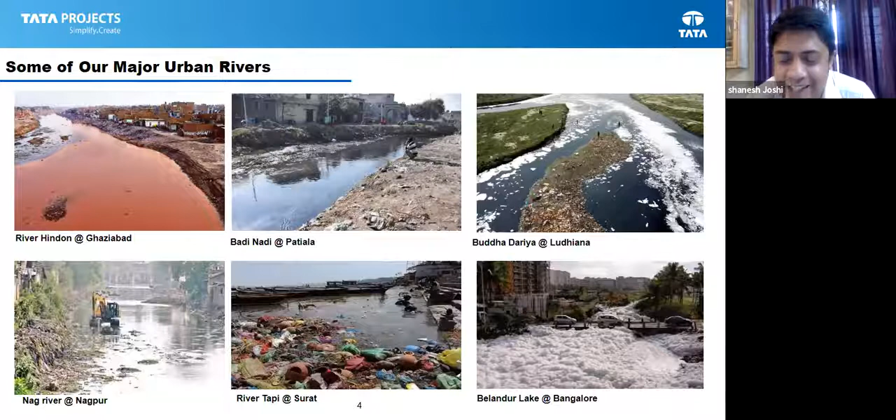These are all different rivers, but they are all the same in character. They look all the same - full of solid waste dumps, heavily silted with sand and hyacinth. You can see a good amount of unorganized, undeveloped areas on the banks of rivers. So we have clearly not managed our rivers very well in the country.

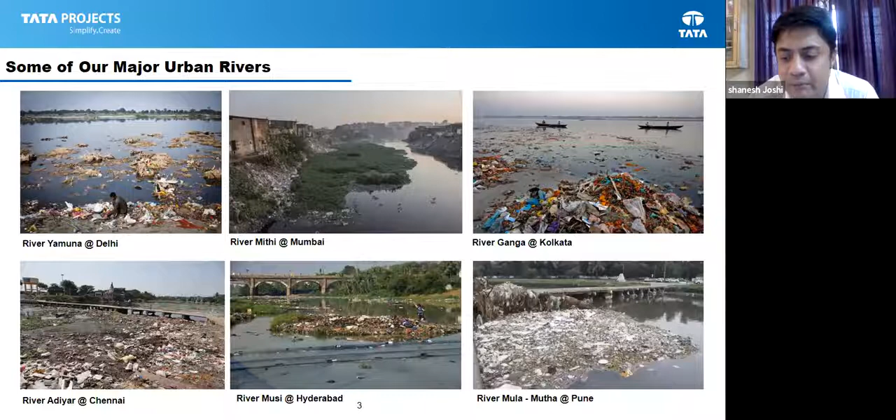This is high time we should give due attention to these, because there are major risks we are carrying today in our lives. The major and most important risk is the pollution of surface water and groundwater. When we are dumping so much solid waste, or not managing wastewater properly, a lot of industrial and domestic wastewater without treatment is going into these rivers.

Definitely we are creating very harmful, unhygienic conditions. We are prone to waterborne diseases, because this water, not only surface water but this water trickles down into the groundwater and spoils the clean groundwater. Then these are typically mosquito breeding fields. So you will suddenly see a surge of dengue, malaria in urban centers quite often whenever it rains and the water stagnates.

So it's a major risk. The second risk is of flooding. I come from Hyderabad, I'm based out of Hyderabad. So the last 10-15 days were really horrible. We have seen a very concerning situation, because the rainfall happened - it was not very heavy, it was moderate rainfall, I would say.

But still we had so much of issue, because the Musi River is fully encroached. There is no buffer zone left, and the water could not actually pass through the river, and the entire city was flooded.

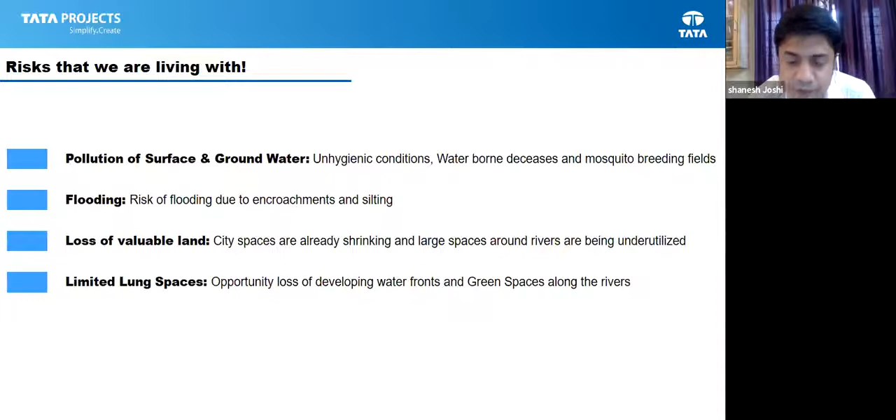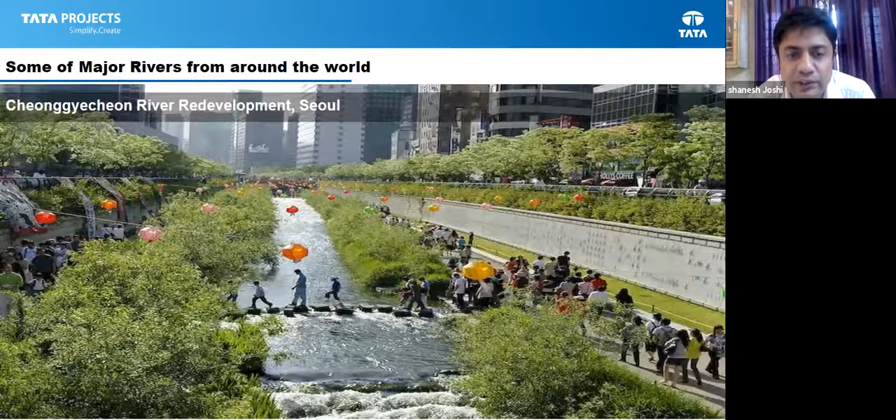So we have clearly missed on this particular opportunity, but I think it's time that we should realize, and we have examples in front of us. If we just step out of India, we maybe go to Seoul - there is this Cheonggyecheon River in Seoul. Then we have the Rochor River in Singapore. Then we have the Bow River waterfront in Canada.

So what do you see in these rivers? While we have seen what our rivers look like - definitely not good - while their rivers are definitely more beautiful and clean, if you notice the skyline next to all these rivers it is so beautiful. You can see commercial spaces, high-rise buildings, parks. So they have captured this opportunity of developing a river zone into a very promising, environment-friendly, and commercially active zone. We have clearly missed on this particular opportunity in our country.

As I was saying, when we entered into the environment business, we realized it's time that, as Tatas, which is a very socially oriented group where we look after social needs and try to address them, we realized we need our urban rivers to go through a major transformation. We actually started working on developing rivers around the country. We identified several rivers, and we got very good support from the government of Rajasthan and central government, who accepted that we were willing to take up this challenge of transforming a nala into a river, and they supported us.

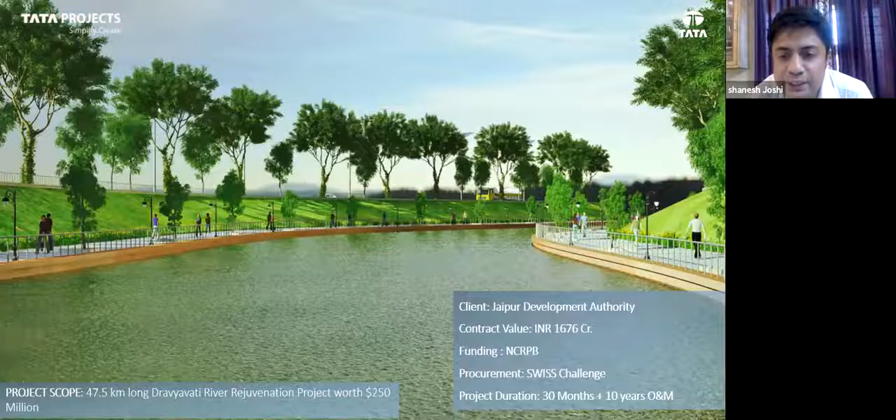He will give you more glimpse on this particular project from a planning point of view, but I'm going to just give you a broad understanding of how this was done. The development agency was Jaipur Development Authority. The total cost of this project was 1,676 crores. It was funded by National Capital Region Planning Board, a central government entity which funds such unique projects. The entire project was completed in 30 months. We started somewhere in March 2016, and on 2nd October 2018, this project was inaugurated for the public.

Now, ironically, you would have all heard about the Namami Gange program, where we are trying to rejuvenate our holy river Ganga. You'd be surprised - we are miles away in Jaipur, very far from Ganga. But this project actually also helped in cleaning Ganga. How? I'll tell you - this is a tributary of the Dhund River. So water from this goes into Dhund, from Dhund it goes into another river, from there to Chambal, Chambal goes into Yamuna, and Yamuna finally ends up in Ganga. So our small effort of creating a good water body here in Jaipur has also benefited the River Ganga. Every small step you take helps create that larger picture.

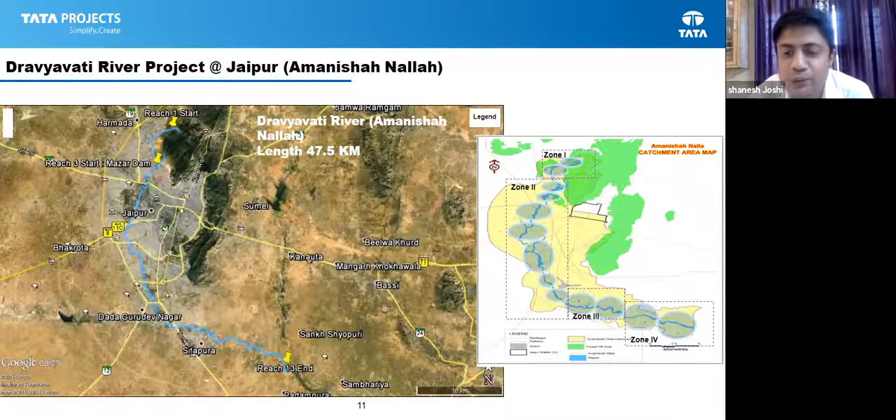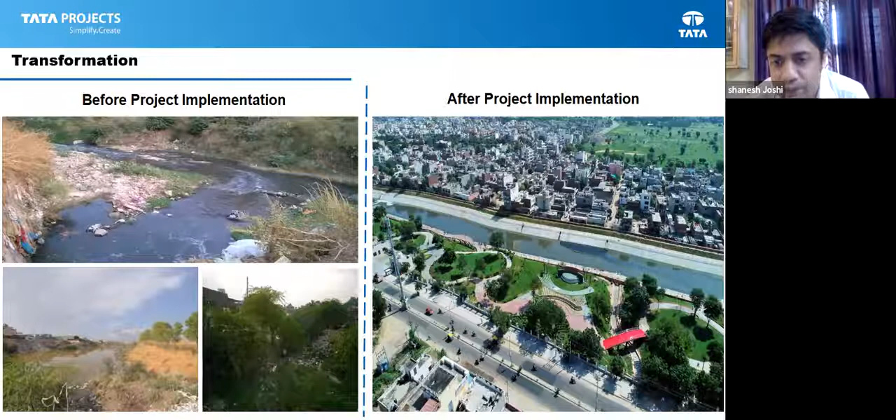What we have done is channelize the river. When you channelize it and maintain it well, you get a good amount of land that comes out of it, where you can plan either public space or commercial space. You can see very beautiful parks have been created - there are walkways, cycle tracks, open air theaters and more. Almost 72 hectares of land has been reclaimed, which they have now started monetizing - they're going to sell this land for commercial purposes, and I'll show you some economics of this project in subsequent slides.

It was a very uphill task - not easy, definitely, because whatever we have done to our rivers, it's going to take a lot more to bring them back to their original form. Huge amount of concreting was done. We don't recommend concreting, but it was necessary because Jaipur has flash floods, and to manage that velocity of water, we had to line this channel in certain sections. It's not completely concrete-lined - somewhere it's natural, somewhere it's stone pitched, but wherever there was a velocity or flooding issue, we had to line it.

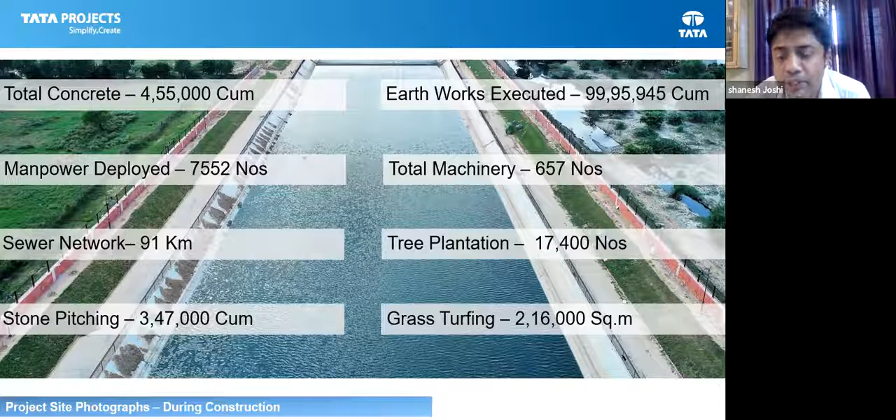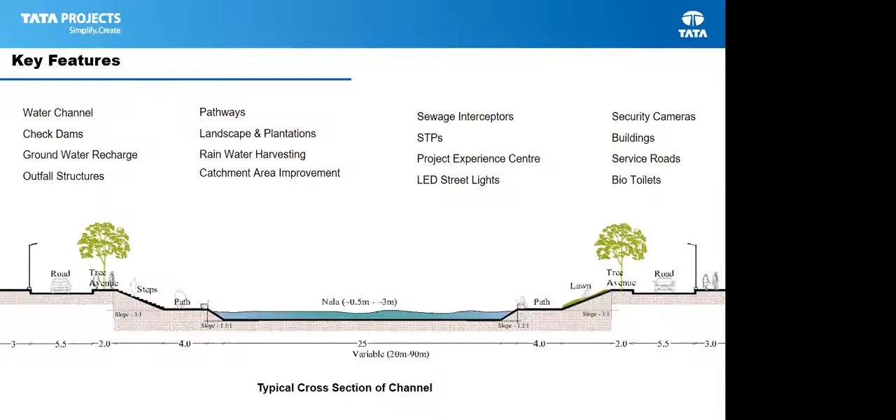Almost 99 lakh cubic meters of earthwork was done, 17,000 trees were planted, and 2 lakh 16,000 square meters of grass turfing. A lot of work went into bringing this river back to its original form, and obviously a lot of money was spent. Key features we envisaged at that point were to have good public space - a 47-kilometer right of way gives ample opportunity to create pathways, walking tracks, cycle tracks. We also had sewage treatment plants, since we needed very clean water flowing into these rivers. We'll talk more about the features when Mr. Santosh takes us through that.

Some of these pictures, I think, are a bit old, but you can see how this entire space has transformed.

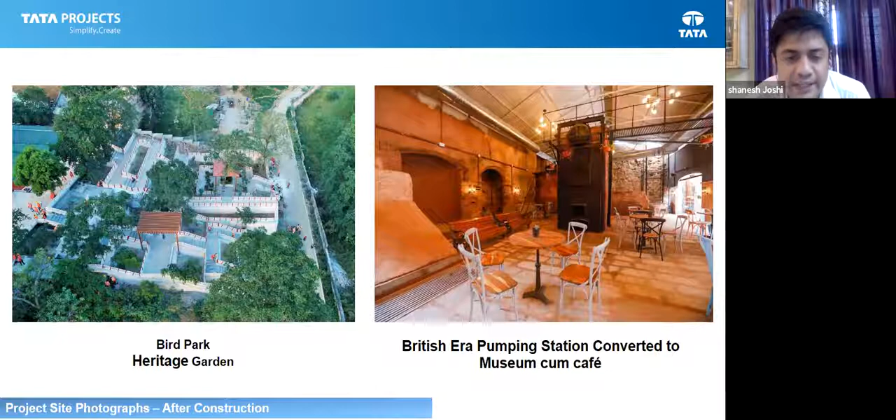While we were working on it, we found a British era pumping station, which was not even noticed before. We have created a beautiful museum out of it, and there is a cafe that has been built. A lot of people come and visit this cafe now. There is a bird park, a heritage garden, and a good amount of green space, though Jaipur is typically desert, people are not really used to seeing so much water and greenery there.

But now I think with this project, the entire skyline and landscape of Jaipur city has changed. We have also constructed a project experience center. Those who happen to visit Jaipur, I would recommend you please visit the project experience center where you will get to understand how this project was conceptualized and delivered.

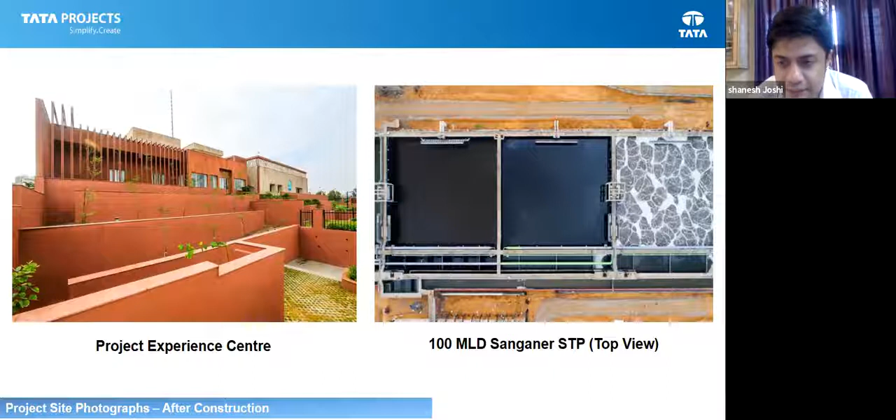We got a lot of appreciation. Our honorable Prime Minister has congratulated us. Our Vice President has taken an aerial view of when this was being developed. We have got several awards.

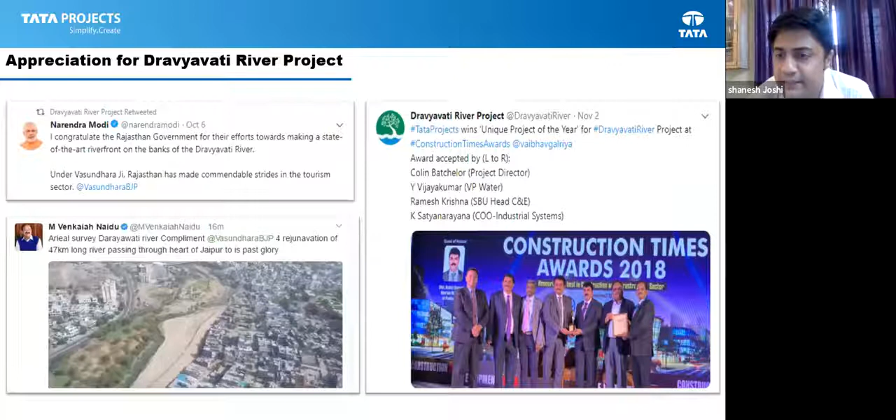So this is typically a people's project. I think any such project, because we are the ones who have actually spoiled these rivers, we should take accountability. Each one of us should take accountability that yes, we have spoiled the rivers, and I think we should take responsibility of cleaning it.

So these are all people's projects. I think we have gone through this people cycle very well in the last 4-5 years, where we had stakeholder engagement, people engagement. We told them why this project is important and why it should be done, and how they are going to get benefited. We organized school picnics.

A lot of students, young minds came. They saw the experience center. They realized, yes, we have not done the correct thing, and it's time that we should correct it. They were actually very happy to be part of this particular project.

So what was the value that has been created? The first and foremost is health. We have improved air, water, and land quality by doing this particular project, which is going to benefit not only the river area, but the entire river zone and the people staying in and around it.

Definitely, I don't think there has been any flooding since 2018 in Jaipur. Since we have commissioned most parts of the project, in fact this year we have seen videos of how well the entire storm water was managed.

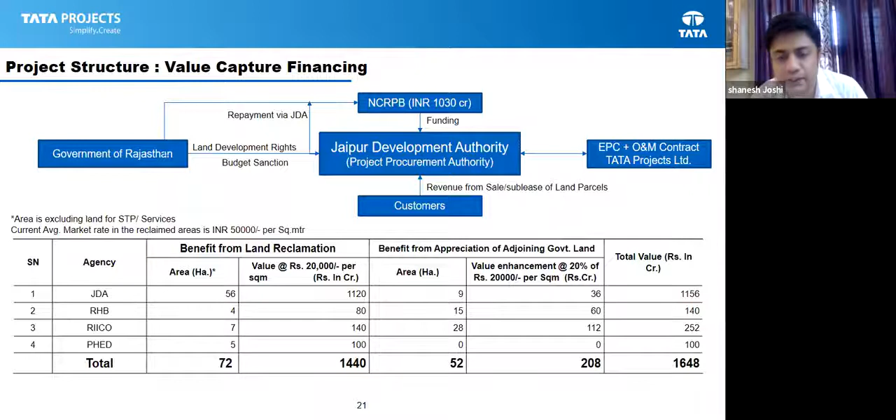Even with conservative numbers, such a project, once fully developed, can contribute to paying back all the loans that the governments would be willing to take. So a very healthy river hygiene project. I think we should all be proud of it.

I think since we have worked on this, we have learned the tricks of the trade, and we have understood how this can be done.

Sabarmati was a project done in Gujarat. I think you all would be familiar with it, and it was very rightfully highlighted by our Honorable Prime Minister. But typically, I would say it is a river development project, not a river rejuvenation project, because they had a good source of water from Narmada, and they wanted to transfer that water into their irrigation channels. So they used Sabarmati as the water channel. They had a good source of clean water with them, and they managed to do development around those areas very nicely. But if we talk about river rejuvenation, this is what and how it needs to be done.

So I think I have covered a bit of the points that I had to share with you all. I hope this has given you a perspective of how these rivers are important in our lives, and how each one of us can contribute to developing these rivers.

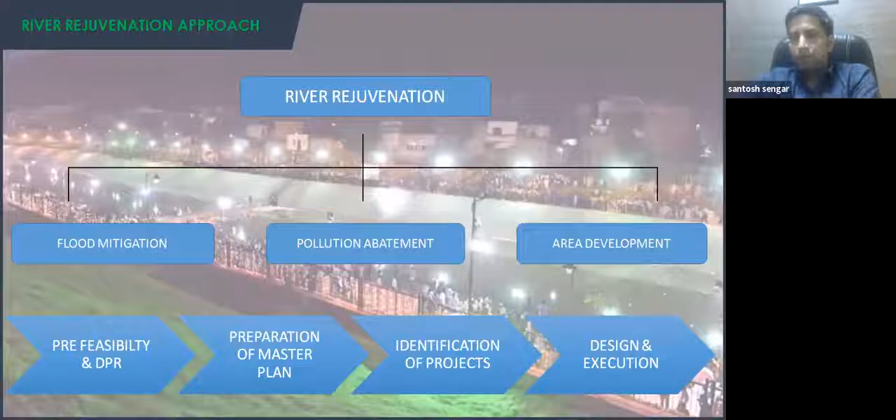River rejuvenation is basically an exercise to bring rivers back to the closest form to their natural form, by way of flood mitigation, pollution abatement, and some beautification - area development, which we combinedly call area development, which is basically master planning, landscape design, urban design, and all kinds of planning and architecture works.

River rejuvenation has three major components. One is improving river hydraulics, basically improving their flood carrying capacity. Second is pollution abatement, which has 3-4 parts: solid waste management, cleaning the water, and then further natural treatment of water.

In area development, we have done various kinds of activities, including master planning, creating urban redevelopment guidelines and all.

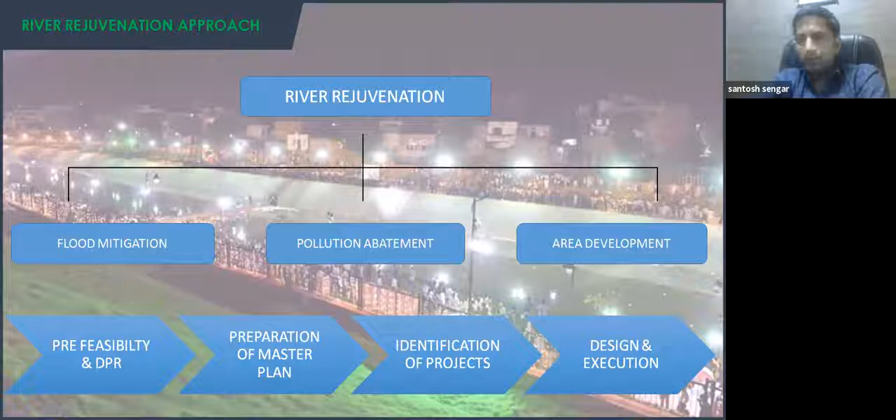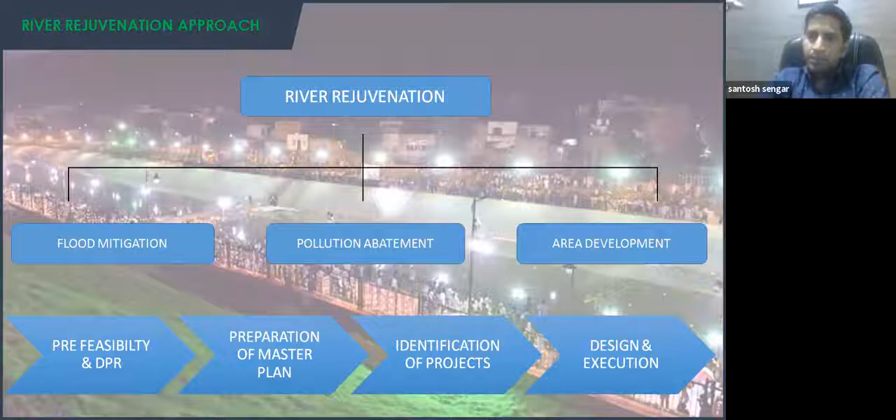In terms of explaining how we go about this whole river rejuvenation process, first part is the pre-feasibility and detailed project report, DPR. After the DPR is formed, then we go for preparation of master plan. When a master plan is prepared, then we identify certain projects for execution, and then we design and execute those projects.

I'll explain the Dravyavati river project in terms of how we go about river rejuvenation, which we have done for many other rivers subsequently. So to understand the Dravyavati project, we'll need to understand closely how this river was.

As Mr. Shanis has told, this river was historically known as Dravyavati, but later the Dargah of Amanishah was established during the Mughal period on the northern edge of this water stream. During that period, Jaipur was a very small, fortified town located on the west of this water stream. Since then, people started calling it Amanishah Nallah, and eventually it turned into a Nala in a very degraded state.

It had lots of sewage flowing into it. Solid waste was deposited all around the river. Generally, we could say it was a degenerated ecological environment. There was slumming along the edges, encroachment at many places where there was hardly enough space for the water to flow out. Length of the river is quite huge, 47.5 kilometers.

The most important thing is that the gradient from start to end of the river was 150 meters, and that was the reason why concretization was done for the river, just to carry that flow, because the slopes were heavy, and it was a major engineering challenge why that was done.

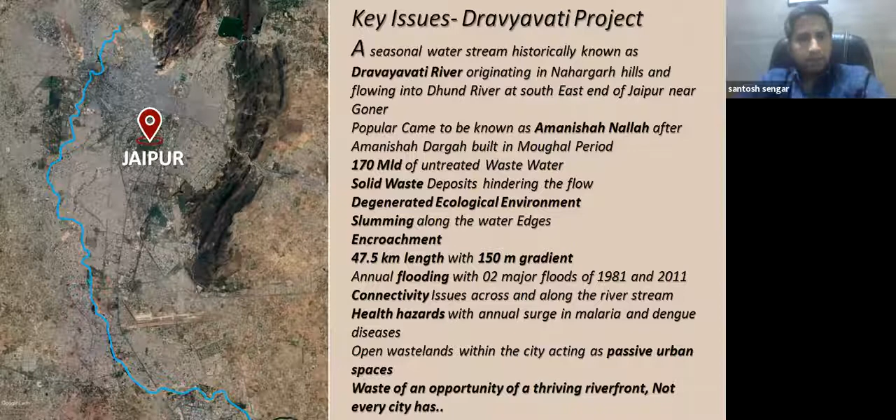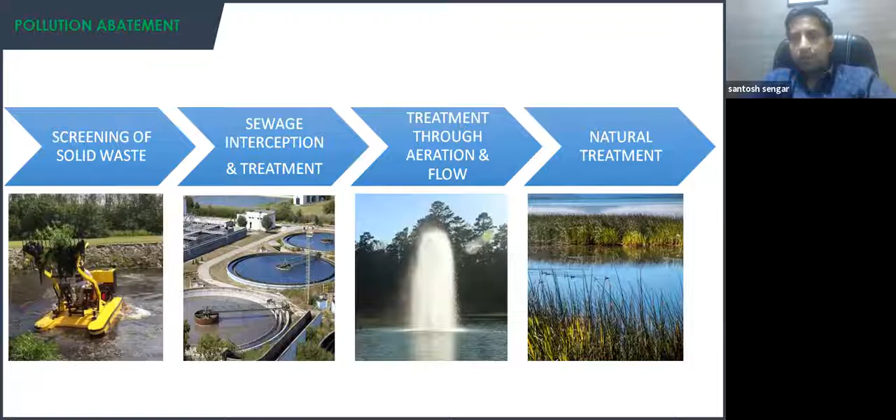I will not go into detail of pollution abatement, but I'll briefly describe. These are basic three or four parts - not necessarily we have done all of it in this project, but gradually we have refined this process. The first part is screening of the solid waste. Then we go for sewage interception and treatment through sewage treatment plants. There's an aeration technology where we create water fountains within the river stream for aeration of water. Then we can also go for natural treatment of water.

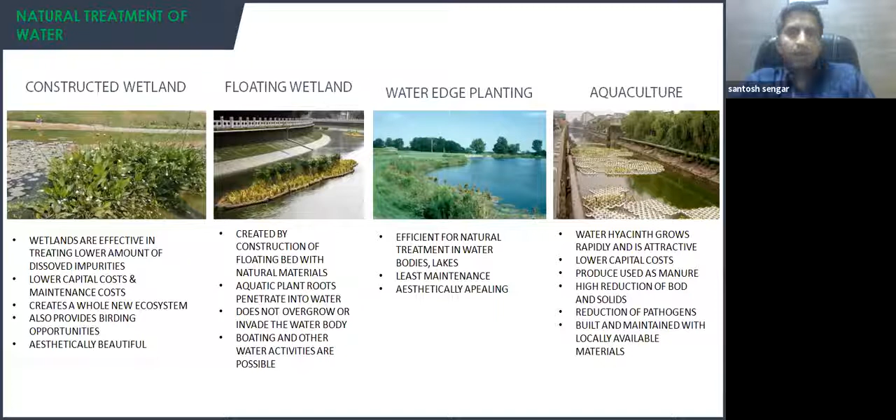There are different technologies to treat water naturally, like constructed wetlands - you must have heard about it - floating wetlands, water edge planting, where we plant certain flora along the edges which will treat the water. And there are floating pods.

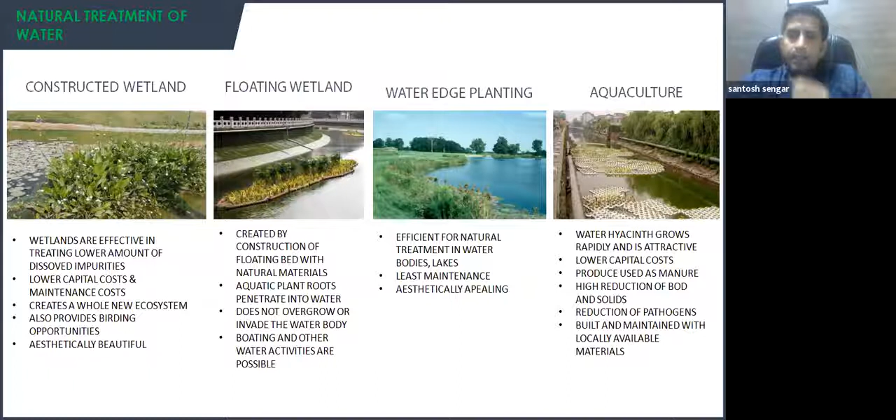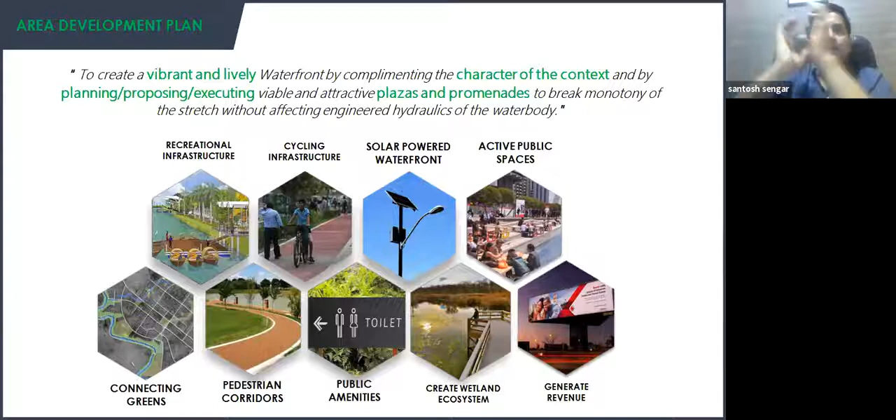So in order to go ahead with this project, we started with creating a vision - basically to create a vibrant and lively waterfront by complementing the character of the context, and by planning viable and attractive plazas and promenades to break the monotony of the stretch, without affecting the hydraulics of the water body. This vision carried everything when we started.

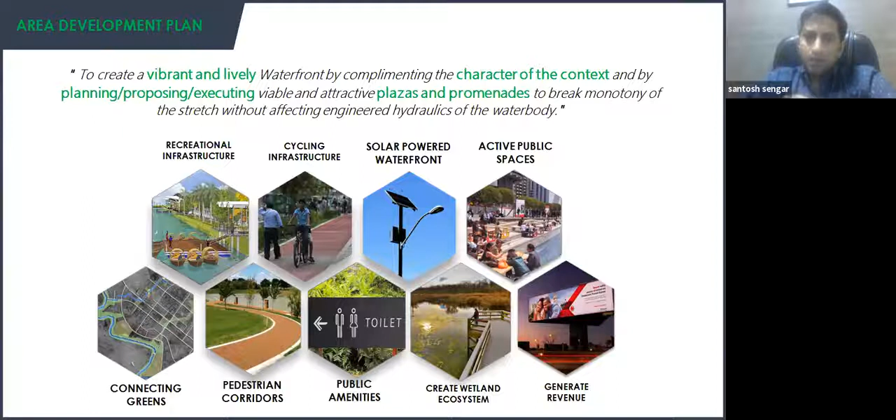And then we came out with certain objectives - to provide certain amenities and infrastructure, like cycling infrastructure, creating public amenities like toilets, creating a walkway, and connecting the greens located all along the river.

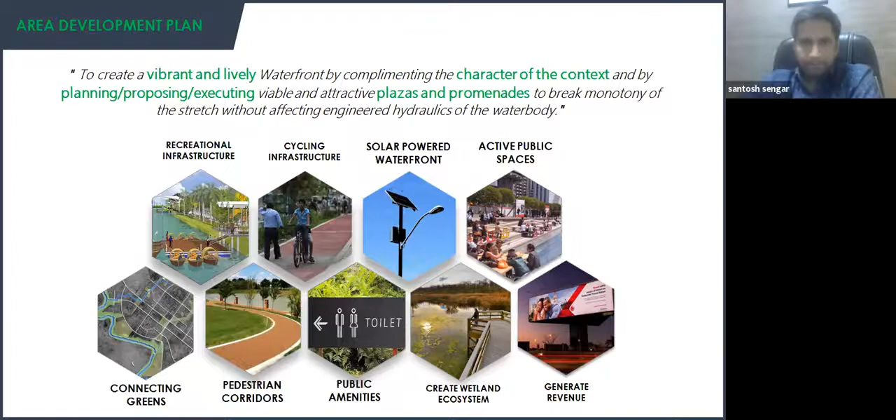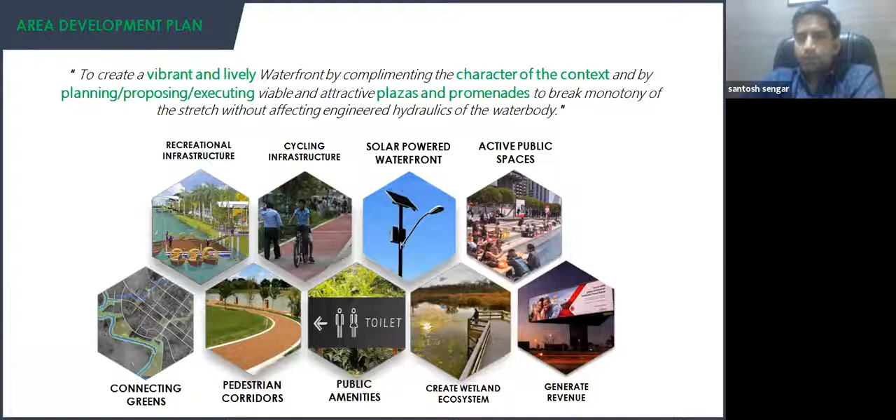In terms of explaining the whole project, I'll explain what were the major projects undertaken. The first part was the master planning of the project to begin with. A master plan for the whole project had to be prepared, and this was a big challenge because the master plan for Jaipur was already in place.

In Jaipur's master plan, this river was shown as a river zone without assigning any detailed land uses. All the lands in the river zone were lying vacant because there were no development guidelines for those areas - even if we don't talk about the river, those areas were lying vacant.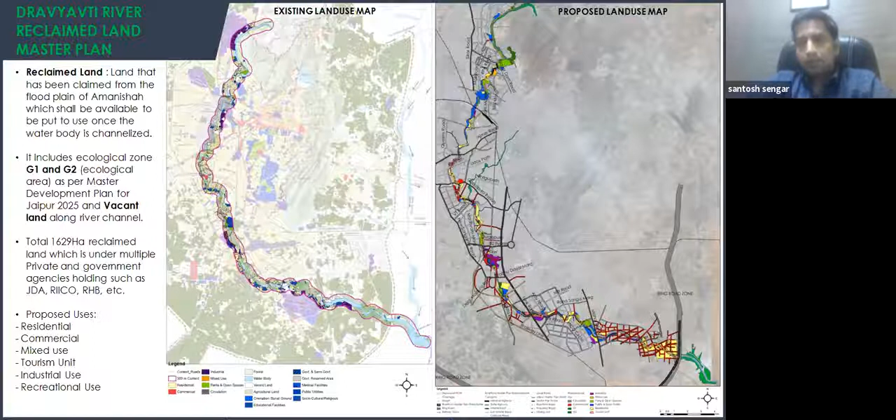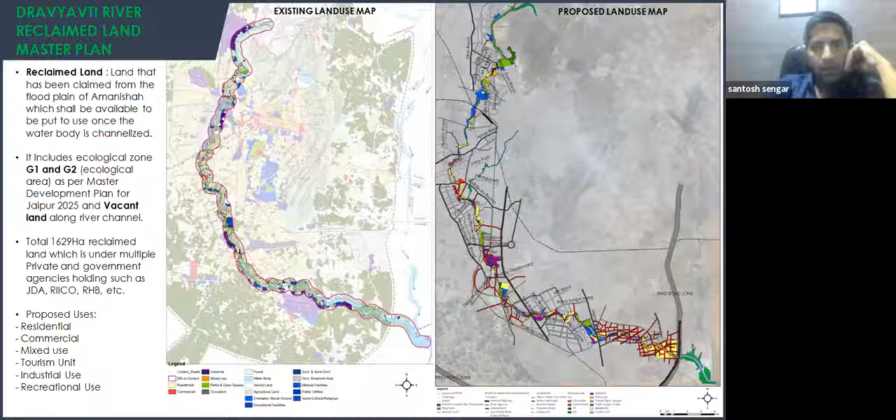So the first exercise in master planning was defining a project area. When we talk about a river, it has a certain affected area or context area. To define that, we had to do certain exercises, so certain layers were taken into account. The first thing was the Geological Survey of India - we collected the river boundary from the Geological Survey of India.

The second was master plan delineation of G1 and G2 - G1 and G2 areas are basically eco-sensitive areas marked by the master plan. Then there was a layer created of vacant land parcels and built-up areas.

Also, the vacant land parcels of government ownership lying immediately next to the river were taken into the project area. And in case of river dams, where water was flooding beyond those areas, those areas were also taken into account. So that's how the project area was delineated.

On the left, these are the basic components of the master plan which was prepared. First was the base map. Second was understanding the engineering aspects, which is very important. When doing a project like this, you need to understand the river hydraulics and different activities proposed from the engineering point of view, and how they will affect your land uses.

First was the preparation of a conceptual plan. Then certain workshops were conducted for public involvement. Then a proposed land use mix was created, which we call the draft master plan. We'll not go into the details, but it also included a business plan.

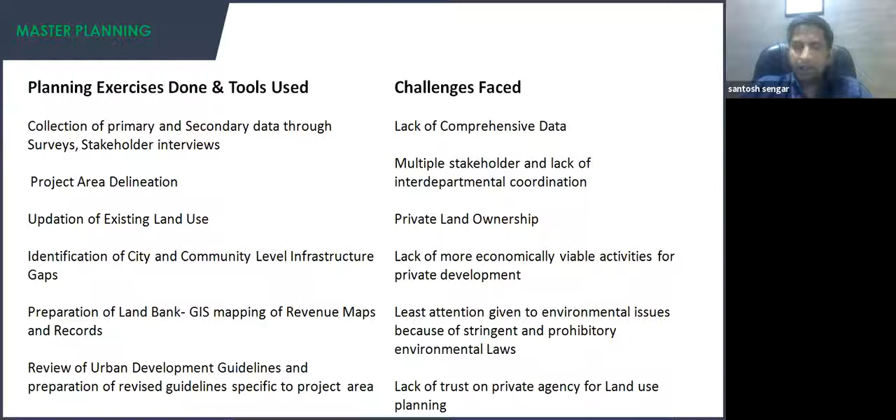The next thing is that when a land use plan is prepared by a private agency, there is definitely a trust factor with the local body. So this is what we faced during the master plan preparation. Though after the master plan, we had identified certain land uses and carried out the riverfront development.

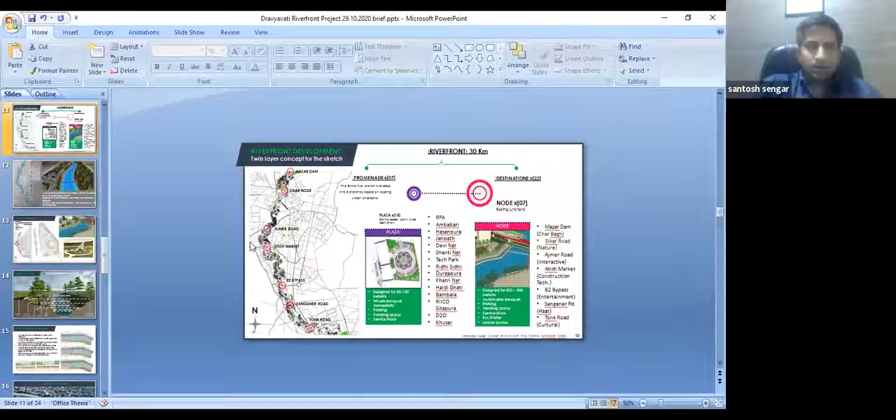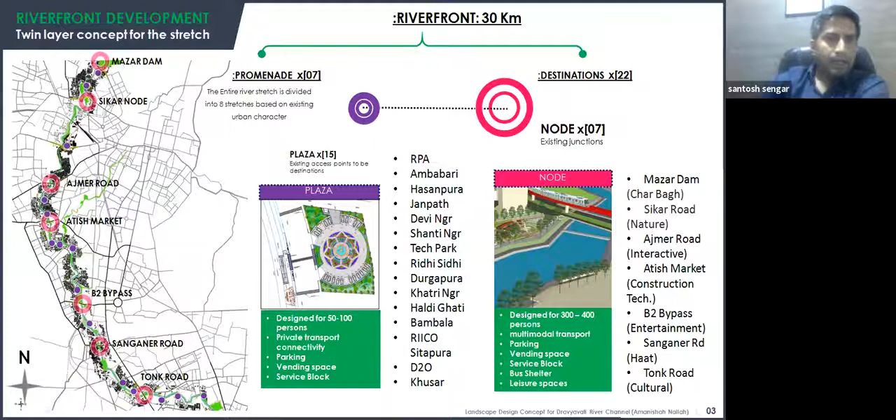In riverfront development of that 47.5 kilometer stretch, we identified 30 kilometers which was within the city limits as the riverfront development, and we divided that stretch into certain destinations.

We had this long stretch which we had to design, and we wanted to break the monotony, which I explained earlier. So we decided to divide that whole stretch into promenade and destinations.

By promenade we mean a linear stretch of river bank where facilities will be located, where cycle track and walkway will be there, and there will be destinations which we have called nodes and plazas.

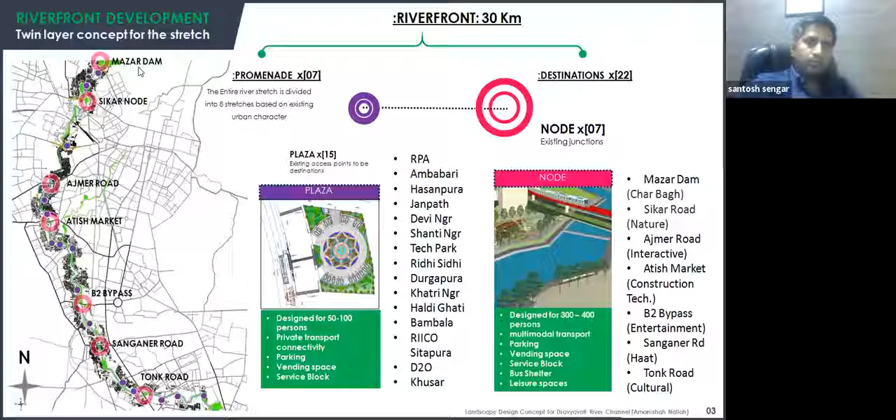On the map on the left hand side, these are the locations of major nodes: Mazar Dam, Sikar Node, Ajmer Road, Atish Market, B2 Bypass, Sanganer Road, and Tonk Road.

In terms of explaining what these nodes and plazas are, if you're from an architecture background in urban design, there's a concept called a node where the urban character is changing. We identified those areas where this urban character was changing, where a major transport node is available, transport connectivity is available, and where people will access the river. Those points were called nodes.

They were designed for a particular capacity. For example, a node was designed for a gathering of 300 to 400 persons, with multimodal modes of transport available. We had to provide parking there, vending spaces were provided, a service block was provided which was basically a toilet block, a bus shelter was provided, and space for recreational activities.

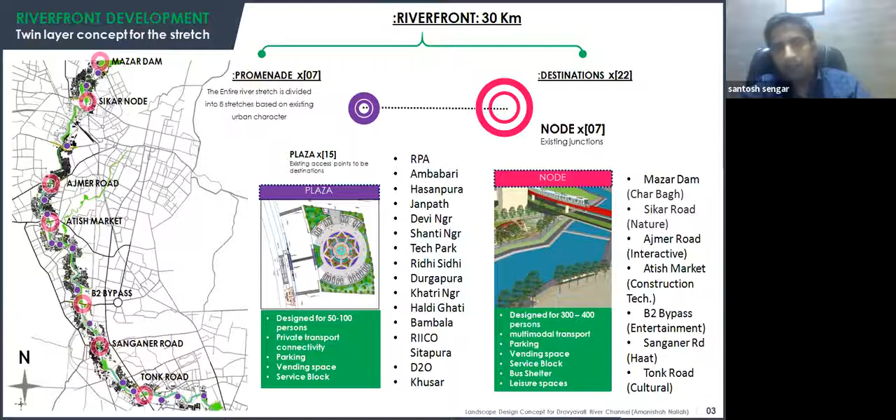A plaza was a smaller place, designed for 50 to 100 people. These were areas located within the residential neighborhood. So nodes were mostly located along commercial areas, and plazas were located in residential neighborhoods.

In terms of giving them identities, this whole riverfront was designed and themed on celestial bodies. Based on our seven nakshatras (constellations), we gave them a theme.

And activities were planned accordingly.

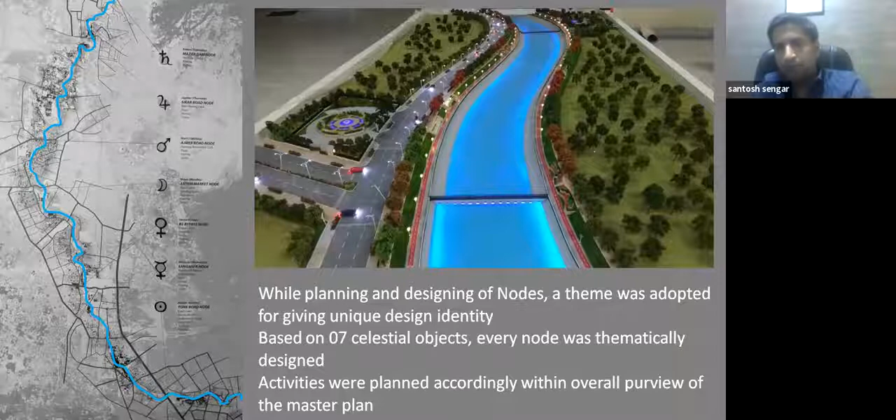This is one example of a node, the Atish Market node. Riverfront restaurants were provided, a sundial was proposed, public toilets were proposed, and vending spaces were provided. This was located near a metro station where connectivity from all other places was provided, and a river crossing was provided.

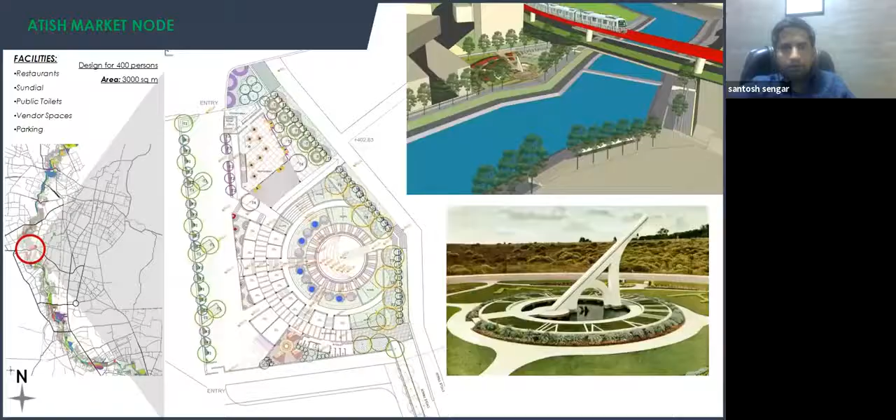In terms of explaining the typical river section, which I have called the promenade, it was designed keeping in mind the engineering aspects of the river design, which Shanice has explained, the hydraulics.

This is one typical section, not necessarily the only section for the riverfront development, but it's designed for different flood levels. The lowest level is the dry weather flow level. The 25-year flood level is the level of the maximum flood in a 25-year period.

Then there was a 50-year flood level and a 100-year flood level. The 100-year flood level was the level where normal development will be permitted. Within the 100-year flood level, we provided cycle track and walkway at the 50-year flood level, and within the 25-year flood level, nothing was provided.

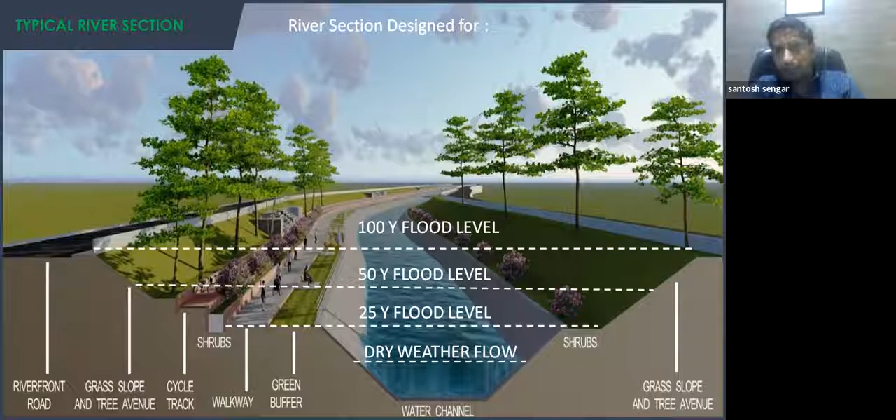So this was the typical section. All your amenities like sit-outs and toilets are provided at the 50-year flood level within the river right of way.

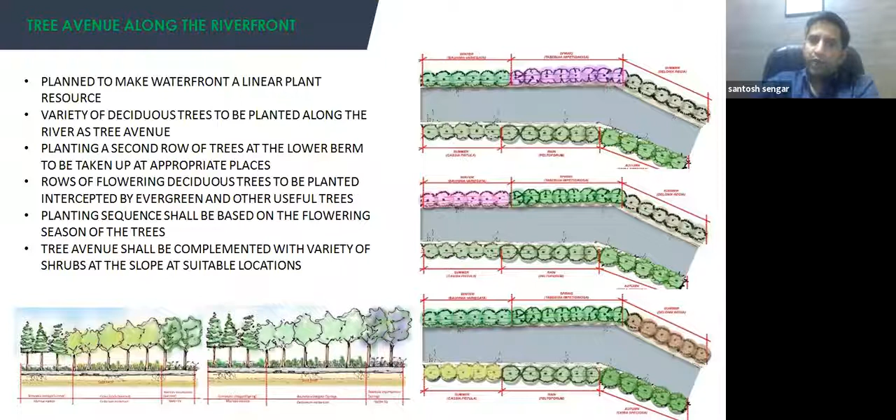In terms of the tree avenue, which is the plantation of trees all along the river edge, it was planned as a linear plant resource with a variety of different trees, arranged in a pattern so that at every point of time there will be flowering in a certain stretch along the water edge.

I'll go to the landscape design of different parks. There were three major city-level parks designed within the project. One of them was the bird park, the Sikar Road Bird Park. This site was basically the site of an old dam created in 1853.

It was an old dam with a broken wall, and there was a small wetland located just off the Amanisha Nala. The idea was to create a space to conserve that wetland where we can go out for natural activities. Bird watching decks were created.

So this was the place where that colonial period pump house was located, which was identified and restored as a waterworks museum and cafe.

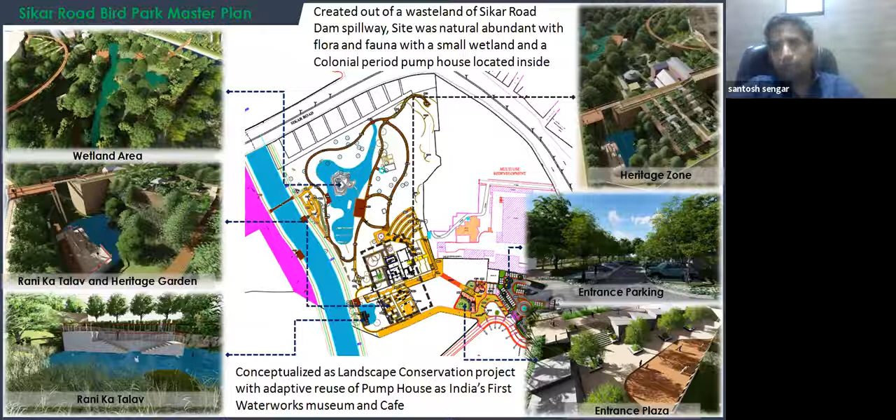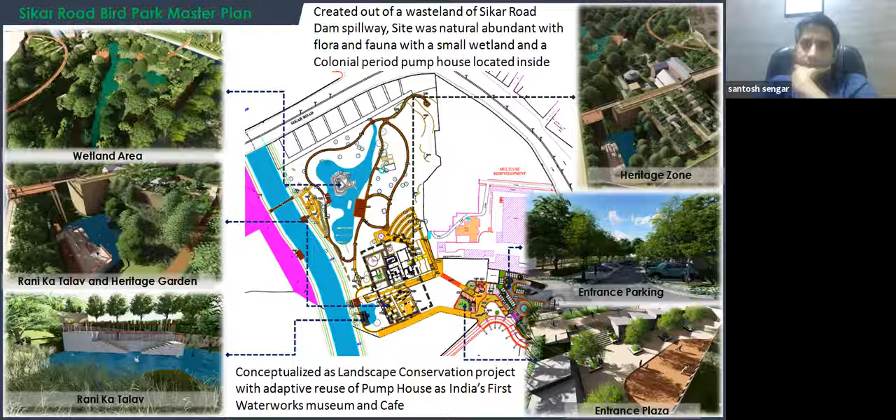Within this project, a wetland area was designed, a recreational water pool was designed, called Rani Ka Talav, to relate it to the general public. These are the entry areas and parking. So there's a 3D view of that park.

Second was the botanical garden. In terms of explaining why this theme was given to the park, there's a city level park themed as a botanical garden.

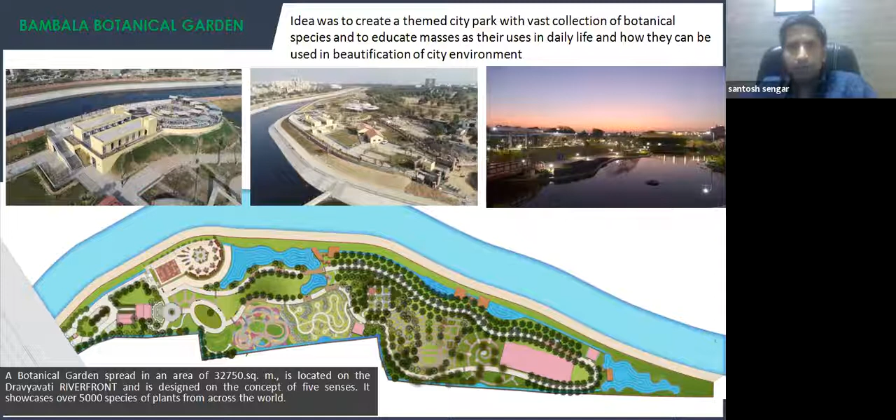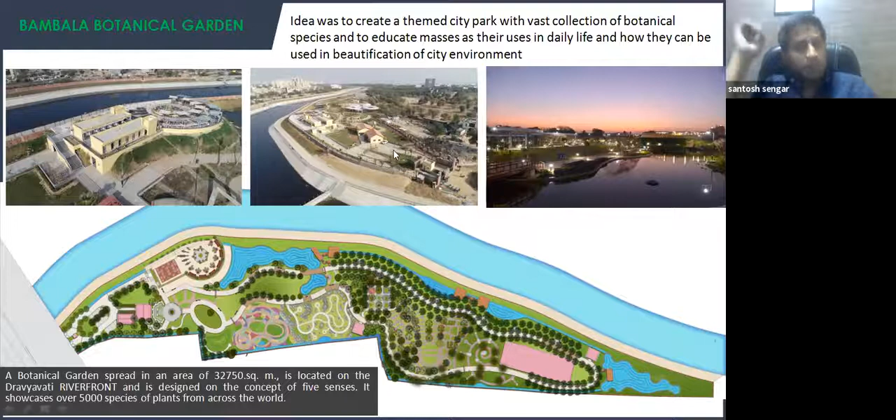These are different pictures. On the top left, there's the cafe provided within the park. There's one aerial view, and these are pictures when it was getting constructed. Even if you go today, now it looks even more beautiful.

Next is the Project Experience Center, which was an important component of the project in terms of public participation. As I could explain, most of the land, around 50%, was in private ownership, and land acquisition was not happening because the Land Acquisition Act 2013 was still on hold, I guess.

So in terms of getting this project executed, we had to convince the general public of the importance of the project. This PEC, the Project Experience Center, was planned to educate people on how this project would help the city or the general masses. It actually helped people understand why this project is so important.

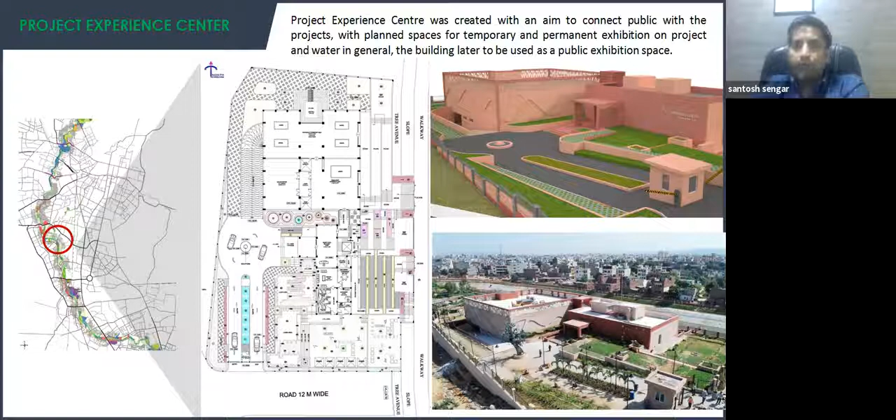Here's the picture of this Project Experience Center building, and these are the interior images of the exhibitions. Photo exhibitions were created, a theme was created on the labors and all. Panels were created on the project benefits, and a city map was created.

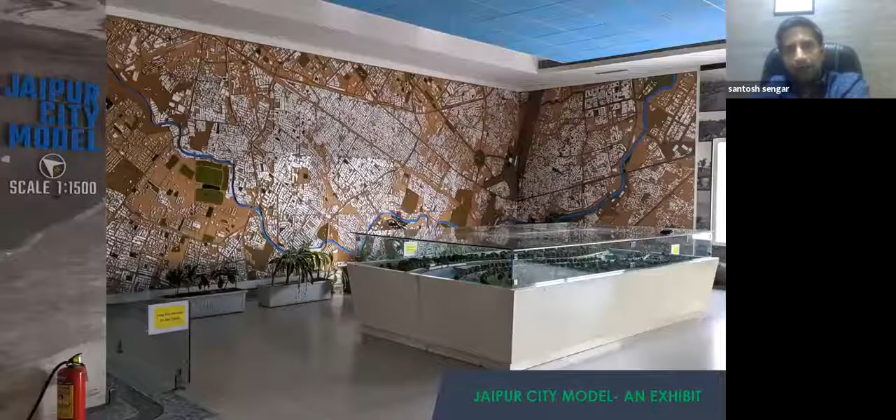I have a bigger picture of this city. A model was created for the Jaipur city in context of the Dravyavati River, so that people living along this river could go and identify their houses with reference to the river. A detailed map for Jaipur city was created, which is still there in the Project Experience Center.

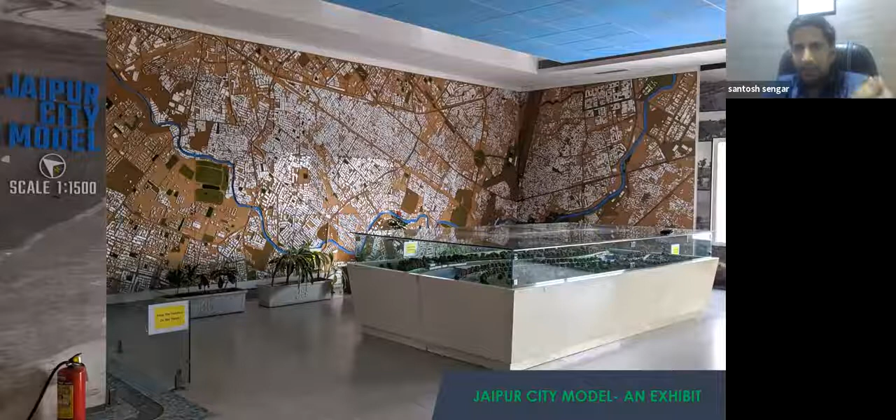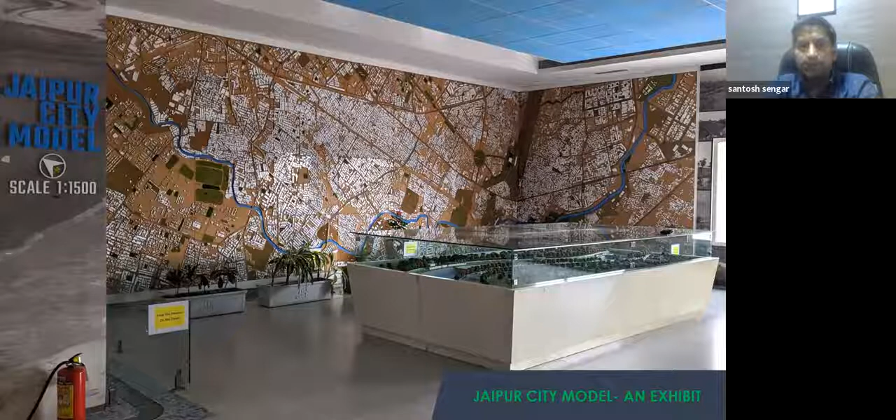By explaining all these slides, this was an exercise with different aspects - urban planning, landscape design, urban design all involved. We had to do a lot of work from land use planning to the details of the project experience center design, which involved a different approach.

To conclude, in terms of riverfront approach, what lessons we have learned: first, in planning, we need to consider a nature-first approach. For example, when master plans are prepared, rivers and water bodies are generally marked as eco-sensitive areas, and further detailing is not done. We need to take them on priority while planning.

We need to change our approach from socio-economic to socio-natural. When we do our planning, we consider a lot of socio-economic aspects, but we need to move from economic to natural aspects. We need to conserve our water bodies and natural resources in the long term.

We need to have more public participation in the projects. For example, for Jaipur, we were lucky that this project was executed in spite of having so much private stake, but for such projects to be successful, we need more public participation.

Greening the neighborhoods - by greening the neighborhood, we need to connect all cross linkages of the green. In this project, we tried to create a linear green spine through the city, but we can also try to connect green spaces located across the rivers.

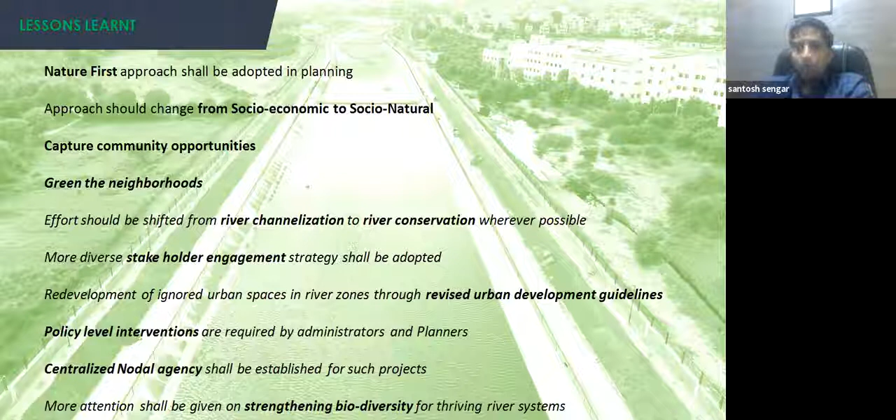More attention can be given to strengthening the biodiversity. Though in this project we could create a bird park, more such projects should be created when we plan such projects, because rivers are not only water streams, but they carry a lot of life with them. So they can support a lot of biodiversity, and we can focus on strengthening biodiversity.

So on this, I'd like to have views of Mr. Shanish as well, and what are the lessons that we have learned. So I'll transfer to Mr. Shanish.

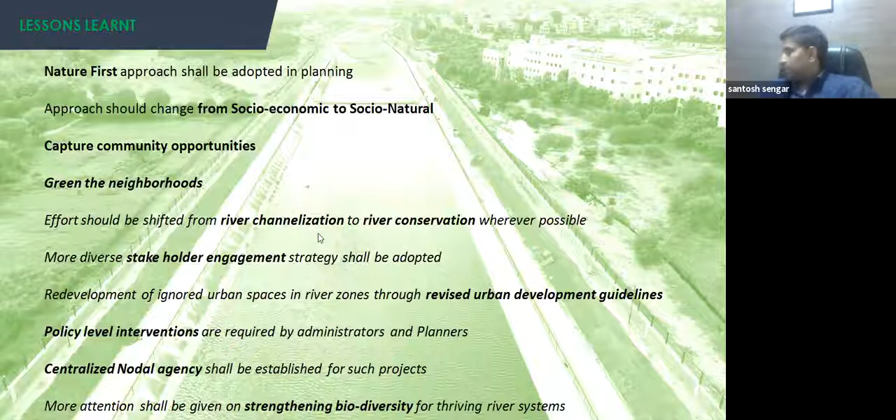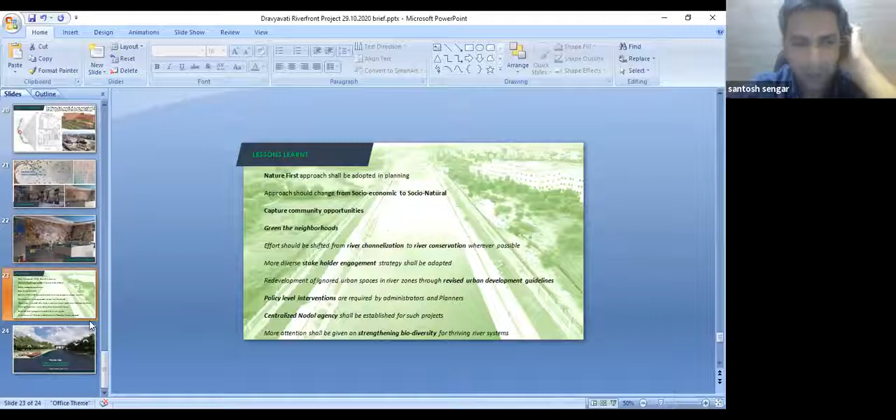Thank you, Santosh, for giving that wonderful insight on the planning part. I'm feeling a little bit thirsty, so I'm having trouble speaking. I'll just get some water. Yeah, sure, thank you.

The biggest lesson that we have learned is that while this seems to be an engineering project, I'm an engineer by profession, and we always thought these are engineering projects where we are talking about hydrology, treatment and getting clean water, etc. But I think these projects are very important from an architecture and planning point of view. That is how the need is established.

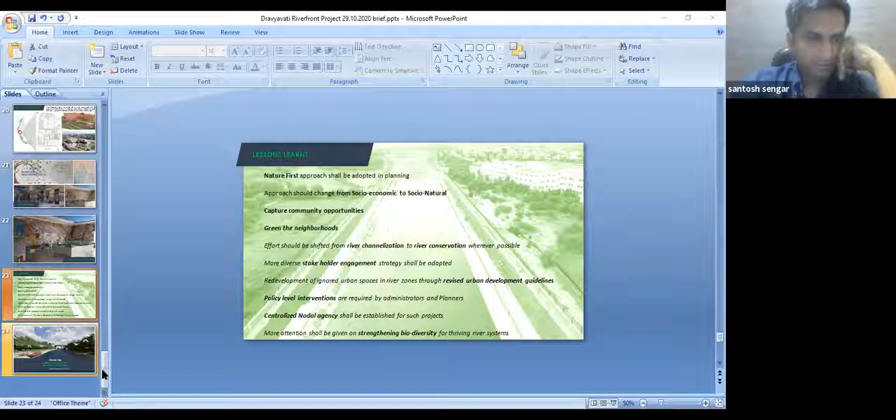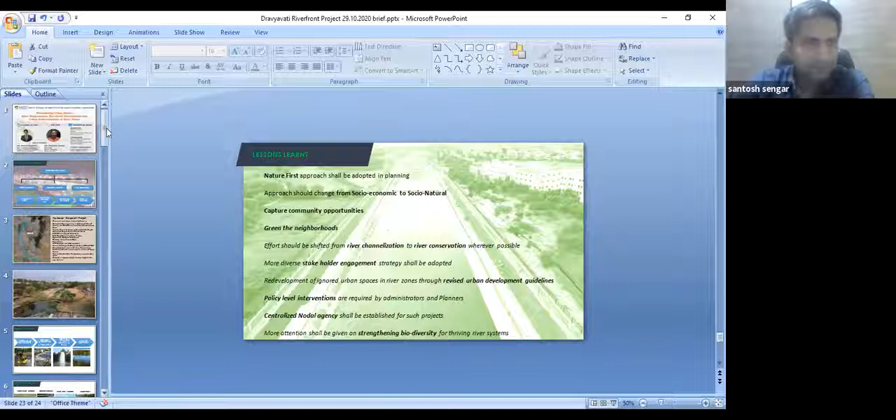Yes, engineering, architecture and urban planning have to go hand in hand. You can't just have one and ignore others. You have to work like a team and then create a project. This is the lesson we have learned, that there are many planning aspects that Mr. Santosh has also explained in detail, how planning of these river zones is going to change and transform the entire city. So I think we have a good opportunity.

I think we are a country of opportunity at this stage. All the Western and European countries are in fact coming to India because they see it as an opportunity to do something that we have not done for so many years. So I think the biggest learning is that it's time we should start taking these rivers as part of our lives. Whether we are staying close to them or not, in a way we are getting affected.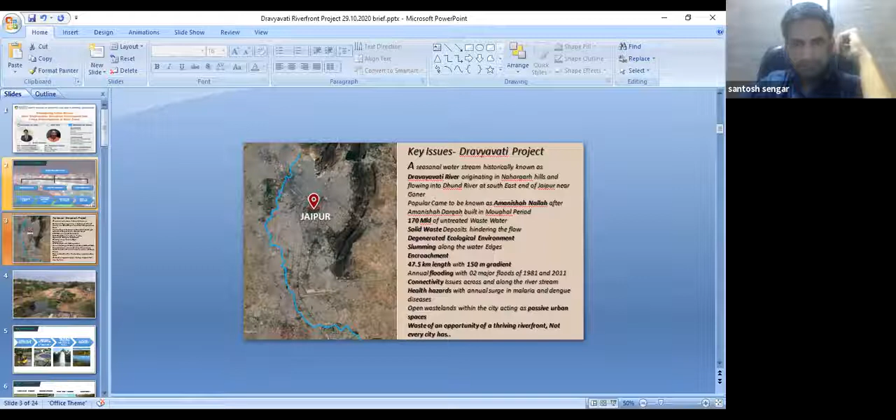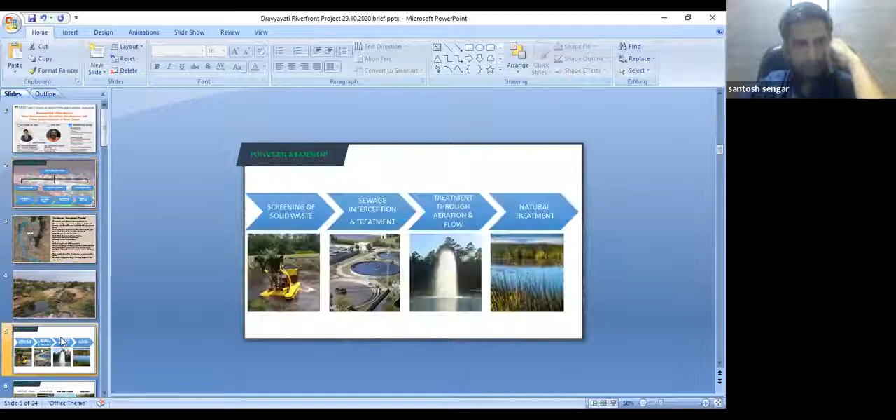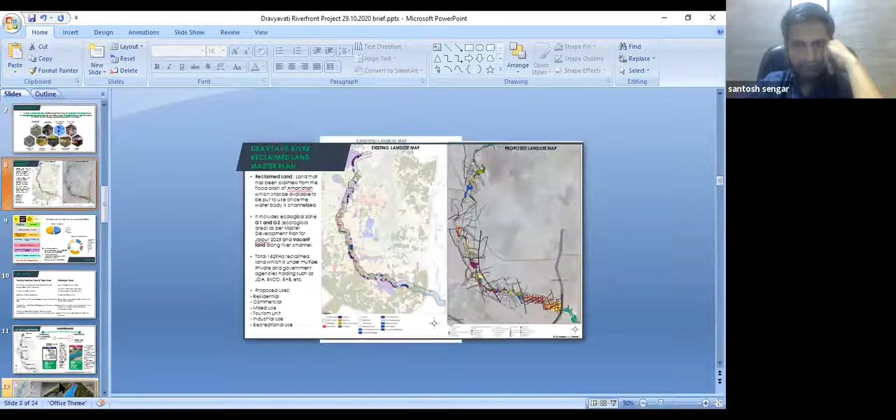So as a team, especially all the young urban planners and architects listening to us, you have a major role to play because you are going to be part of many development corporations, consultants, or some of you are going to start your own ventures. So wherever you go, if you have a good policy framework which is getting institutionalized as we move along, when you graduate or postgraduate and come out in the market, you will have an ocean of opportunity here.

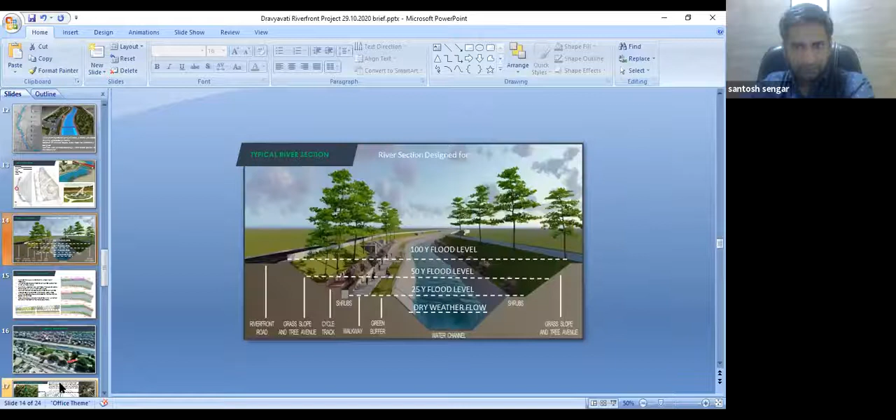We look forward to all of you to contribute your piece of mind, information and knowledge in this, so that we have very beautiful urban centers in the country. I think that's all from our side. If you have any questions, thank you.

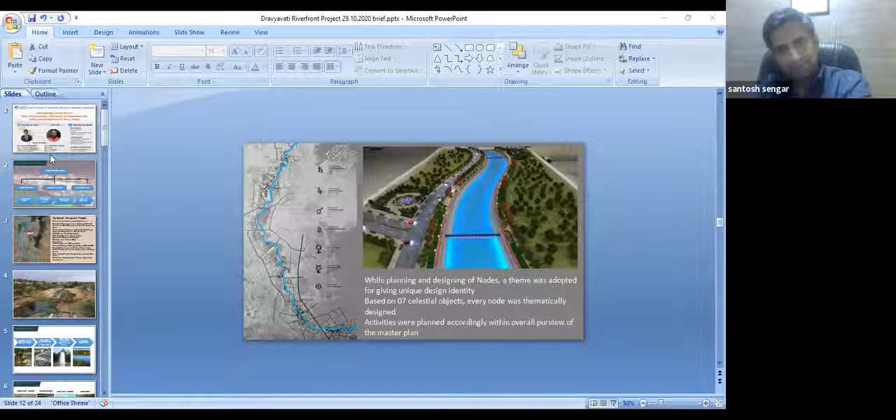My first question is, it's been observed that riverfront development is done keeping in mind the rejuvenation of the river, to protect it from further pollution and to create a recreational area around it. But often it's been observed that it further leads to creating more pollution after the development.

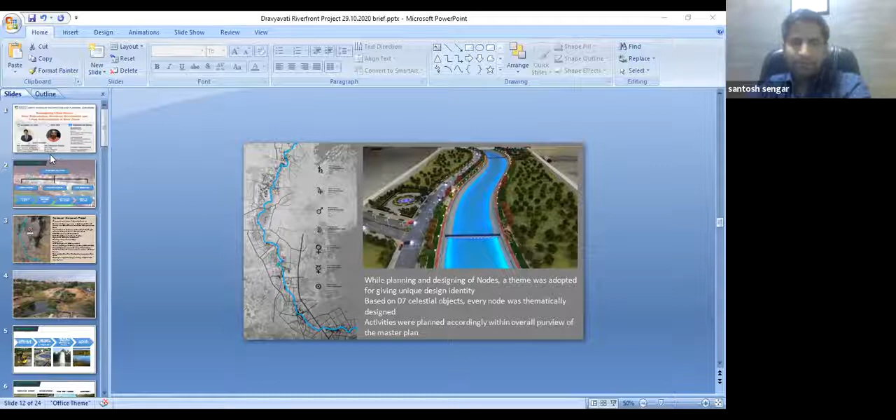Okay, so I'll go for that, Santosh. It does not. In fact, why it happens is that we have not managed our rivers well. I think whoever has asked that question, possibly it must be coming that when you have a good river, then you have so much of development, more population, more water consumption, more solid waste coming into the vicinity of river.

Yes, there is, but then what we do when we plan such projects. So for example, when we have done planning for this particular project, we have planned for all the developments which are going to happen for next 30 years. So we have done population projections. We have seen what kind of population is going to come into that area. So thereby, how much more wastewater is going to get generated, what kind of industries would come.

So then you have to plan for effluent treatment plants. Then definitely more amount of solid waste is going to get generated in that area, so you need to have larger capacity of waste management. So all those aspects are taken into consideration when we are planning, and we typically plan for 30 to 40 years of horizon. So I would say that if we don't manage our infrastructure well, yes, possibly we will do some more damage to it. But that is not the intention. The intention is to create infrastructure so that we actually plan for next 30 to 40 years so that it is protected.